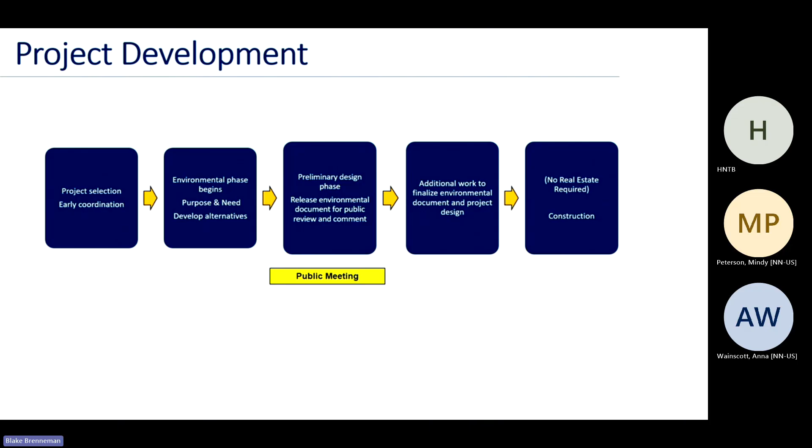The fourth stage involves additional work to finalize the environmental document and project design. After receiving input, the project team finalizes the environmental document and design plans, and the project decision is made. The fifth and final stage is project letting and construction. The project is advertised for contractor bidding and construction can begin. Environmental commitments are carried through to construction to ensure compliance.

The purpose and need of a project is the identification of an existing or potential issue within our transportation infrastructure and the proposed action or plans the proposed project is expected to address. The need for the project is the existing truck parking lots, which are undersized for current and predicted future capacity demands. Lack of adequate parking availability has resulted in unauthorized truck parking along the entire lengths of the entrance and exit ramps at the northbound and southbound rest areas.

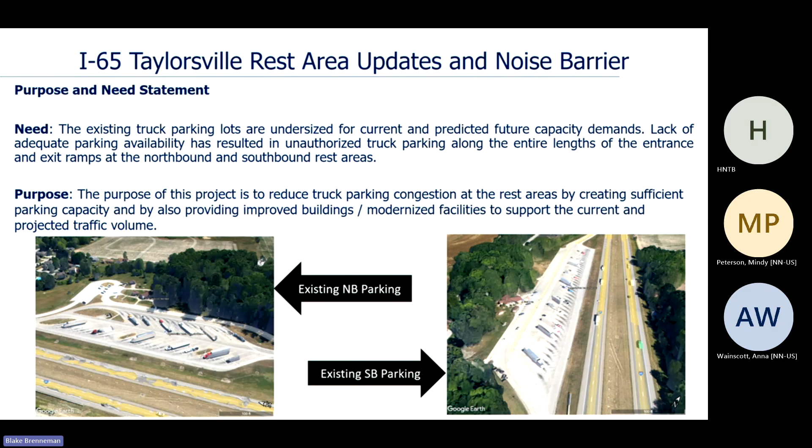The purpose of this project is to reduce the truck parking congestion at the rest areas by creating sufficient parking capacity and by providing improved buildings and modernized facilities to support the current and predicted traffic volume. The photo on this slide shows the current Taylorsville rest areas.

The no-build alternative. This alternative allows the existing facilities to remain in place with no improvements and no financial cost or environmental impacts. This alternative does not meet the purpose and need of the project because it does not address the undersized truck parking capacity. Therefore, this alternative has been dismissed from further consideration. Based on INDOT's rest area and truck parking plan, no other alternatives other than the no-build and preferred alternatives were considered.

INDOT currently operates 26 rest areas and welcome center properties across the state. The goal of these facilities is to serve the traveling public by providing opportunities for travel breaks on the interstate system. With safety as a primary consideration, INDOT's rest area and truck parking plan establishes layout guidelines as well as recommendations for the future of the INDOT rest area and welcome center portfolio.

This investment will provide the opportunity to increase the total number of INDOT's truck parking spaces by 1,161. This will be achieved through the complete property reconstruction of 9 new welcome centers, the addition of 2 new rest areas on I-69 in southern Indiana, 10 rest area transitions to truck parking only facilities, and 4 complete rest area property closures. Now, I'll pass the presentation off to Imtiaz with JSE to discuss the project location.

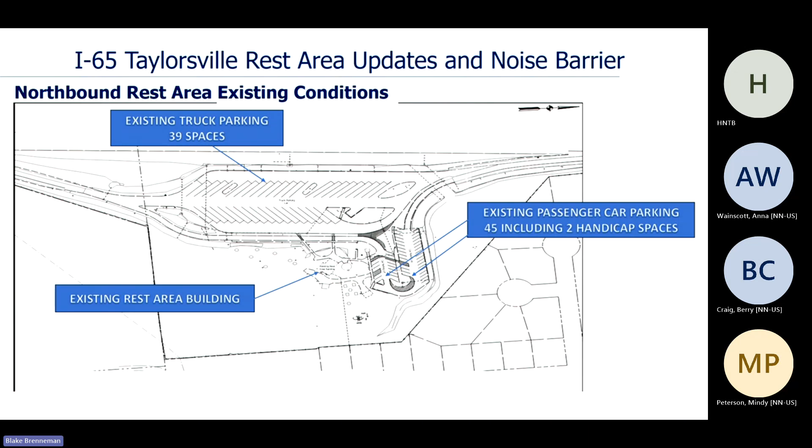As part of the proposed improvements, the existing rest area will be converted into a truck parking only facility and will provide 82 truck parking spaces. It will also have a combined restroom and vending building, as well as a separate maintenance building. Existing water, sewer, and electric utilities will continue to provide the same services.

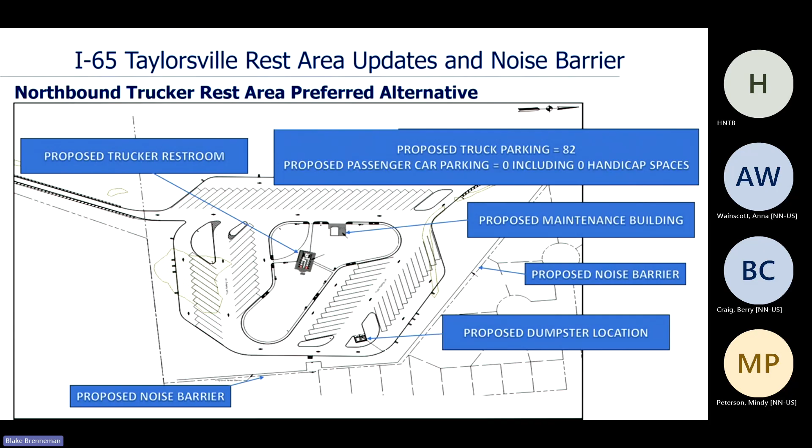Noise barriers will also be constructed along the east right-of-way line of the rest area from the beginning of the truck parking area encompassing the entire truck parking area, as well as along the I-65 northbound entrance ramp up to the last residential area. In addition to this rest area, there's private sector travel break opportunities on I-65 at US 31, mile marker 73, located approximately 4 miles north of the I-65 northbound Taylorsville rest area.

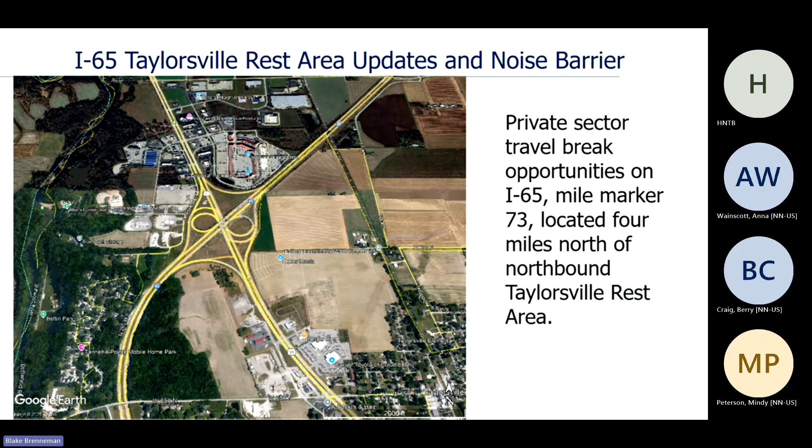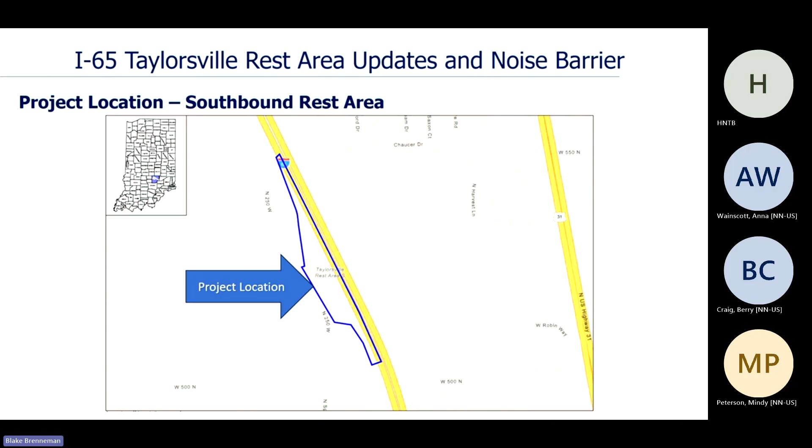This slide shows the existing I-65 southbound rest area location with respect to adjacent residential areas, County Road North 250 West, as well as West 500 North. The existing rest area is located on I-65 southbound, approximately 2 miles south of the I-65 and US 31 interchange in Bartholomew County.

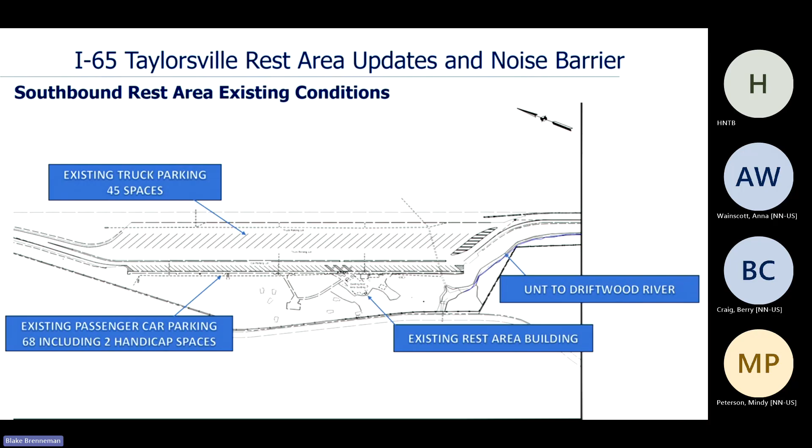The existing I-65 southbound rest area consists of 68 car parking spaces, including 2 handicap spaces, as well as 45 truck parking spaces, and also consists of a smaller rest area building with restrooms, a separate vending building, as well as a separate maintenance building.

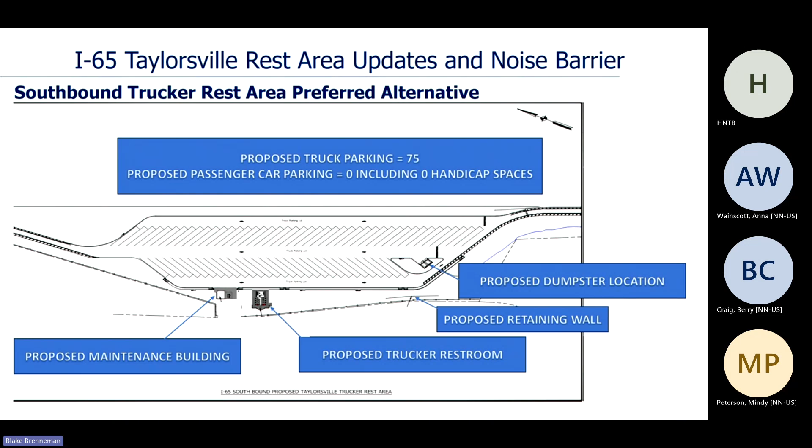As part of the proposed improvements, the existing rest area will be converted into a truck parking only facility and will provide 75 truck parking spaces. It will also have a combined restroom and vending building, as well as a separate maintenance building. Existing water, sewer, and electric utilities will continue to provide the same services. No noise barriers are planned for this site.

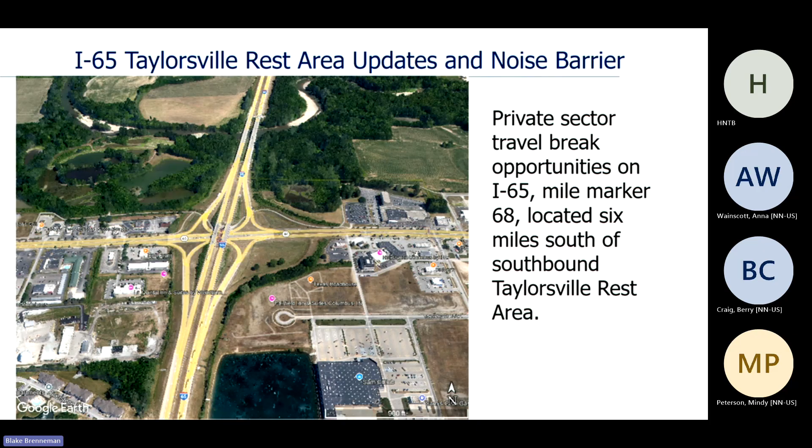In addition to this rest area, there are private sector travel break opportunities on I-65, mile marker 68, located approximately 6 miles south of the I-65 southbound Taylorsville rest area. Now, I'll pass the presentation off to Jas to discuss the project environmental aspects.

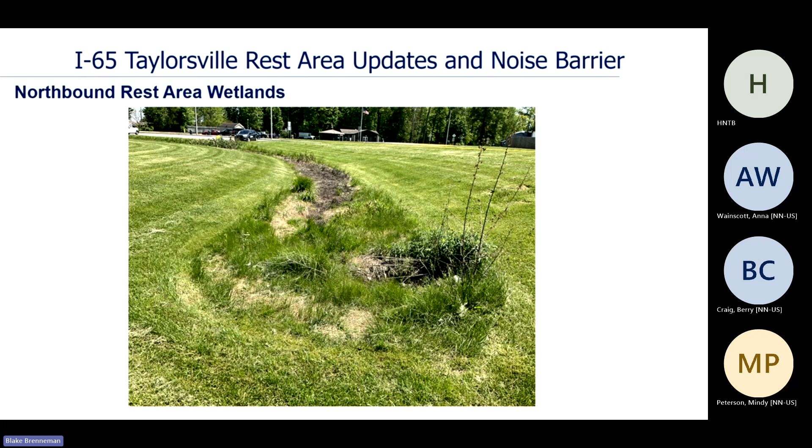A total of approximately 7.1 acres of terrestrial habitat impacts will occur at the northbound and southbound rest areas, including just under 4.2 acres of tree removal due to demolition of existing rest area facilities, construction of new rest area facilities, and grading. Avoidance and minimization measures considered include minimizing the size of the project area, minimizing vegetation clearing to the furthest extent possible, and seeding disturbed areas after construction. This photo shows terrestrial habitat that will be disturbed at the northbound rest area.

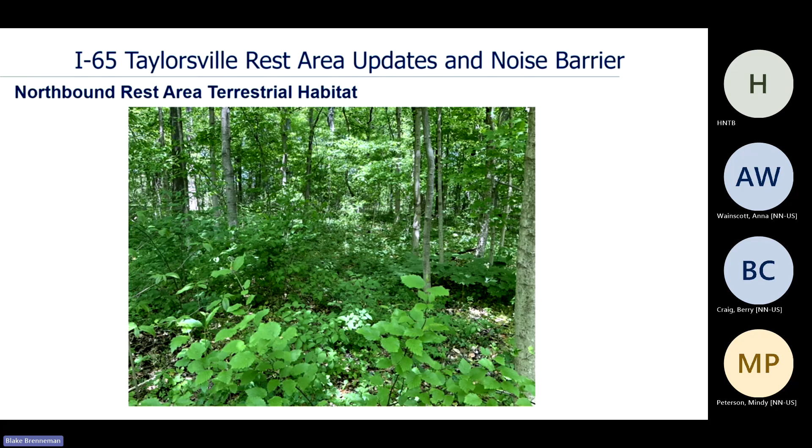1 stream and 1 wetland are present at the southbound rest area. An unnamed tributary to Driftwood River flows northwest through the southbound rest area, along the end of the parking lot and exit ramp. Approximately 156 linear feet of permanent impacts to this stream are anticipated as a result of grading.

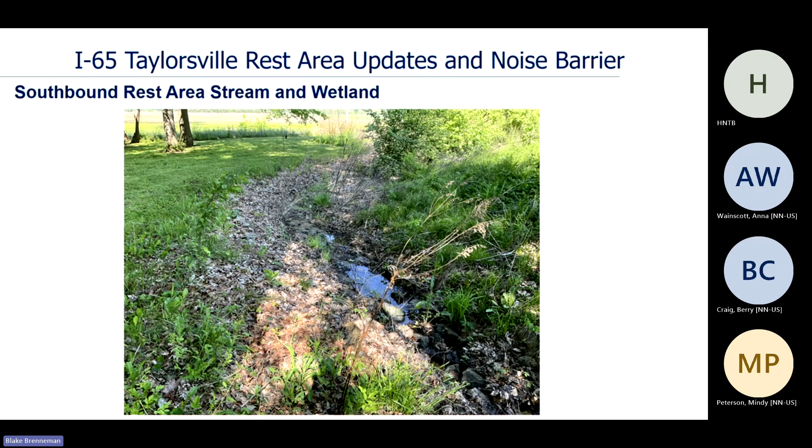The following is a presentation of INDOT's noise barrier policy prepared by HNTB. Thank you, HNTB, for allowing the use of your video.

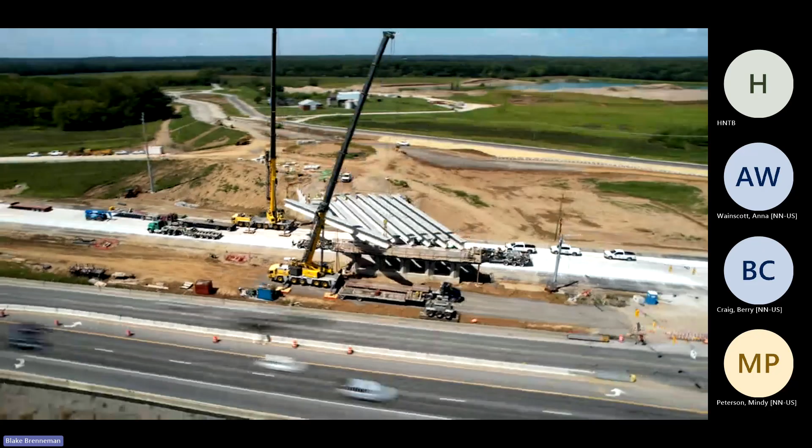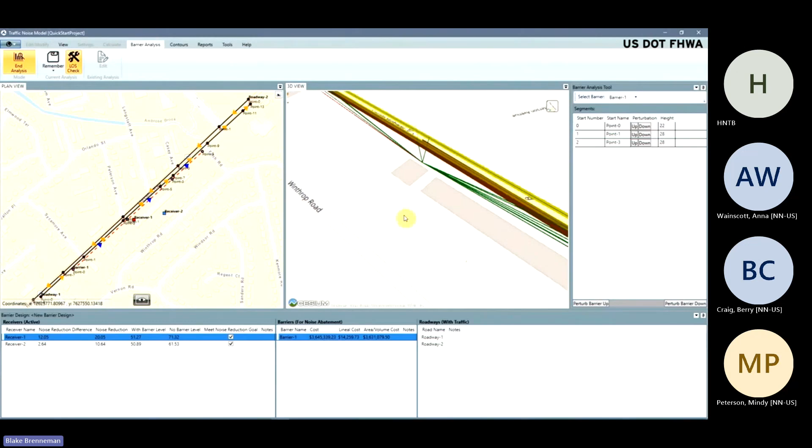As the crossroads of America, Indiana is working to improve its roads. With new infrastructure comes the potential for more noise. Certain types of projects, such as adding travel lanes, require a noise analysis. In compliance with Federal Highway Administration guidelines, INDOT has a noise policy to ensure decisions about noise barriers are consistent across the state. Here's how it works. Step 1. The traffic noise model. We use a model to determine the existing noise levels and predict how the noise will grow in 20 years. The existing model is validated through in-field measurements.

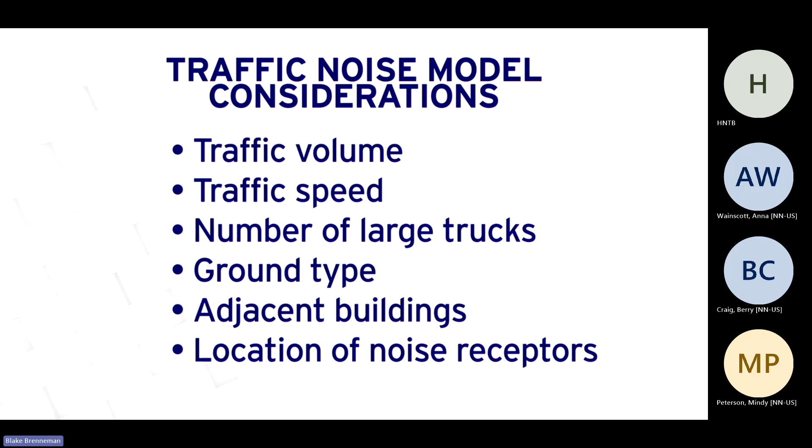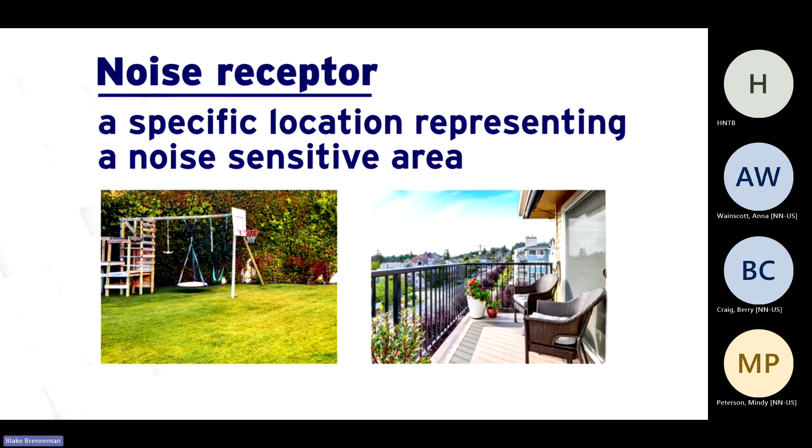The model considers many factors, including traffic volume, traffic speed, number of large trucks, the ground type, adjacent buildings, and location of noise receptors. A noise receptor is a specific location representing a noise-sensitive area. Noise receptors can include places like residential backyards or apartment balconies. After the model is done, we move on to step 2, identify noise impacts.

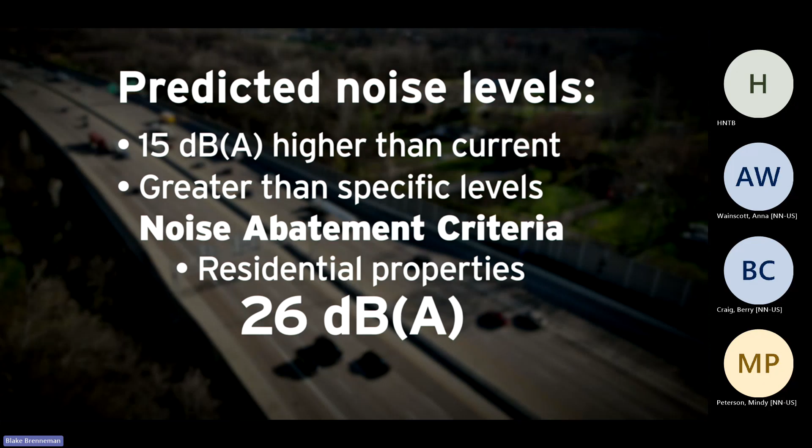There are 2 ways for a project to be considered for noise barriers. Predicted noise levels are 15 decibels higher than what they are currently, or noise levels are predicted to be greater than specific levels called noise abatement criteria. For noise at residential properties, this specific level is 66 decibels. But what does that mean? A normal conversation between 2 people 3 feet away is usually measured around 60 decibels. At the Indianapolis Motor Speedway, the track can be 100 decibels or louder.

Not all changes in sound are perceptible by people. A change in sound of plus or minus 3 decibels is barely perceptible. Plus or minus 5 decibels is clearly perceptible. And plus or minus 10 decibels will be perceived as twice or half as loud, respectively.

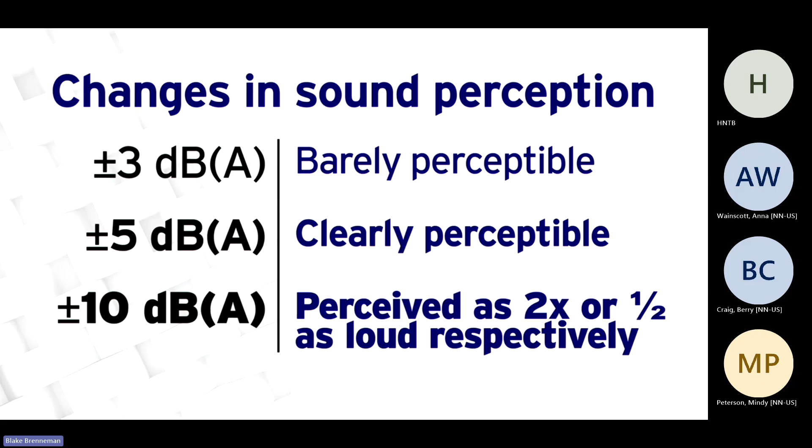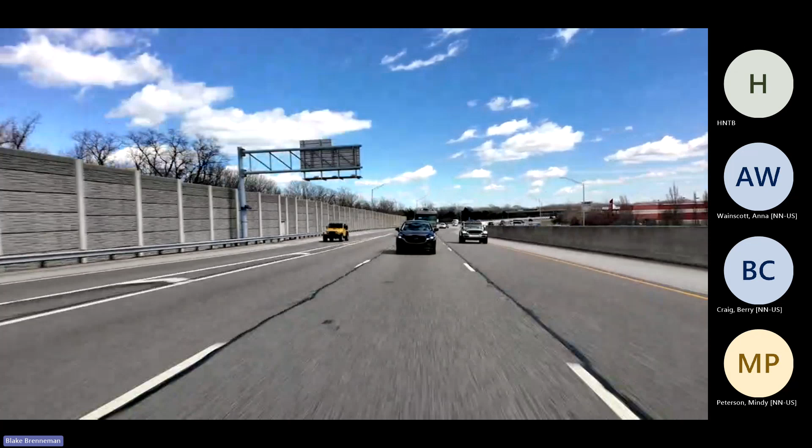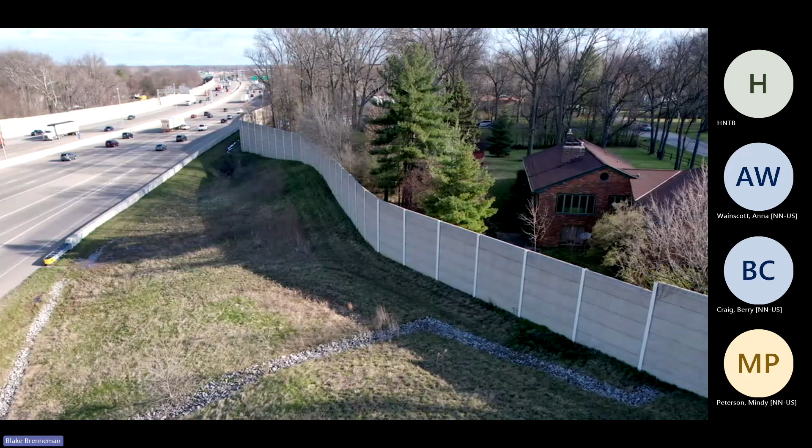Once the noise impacts are identified, INDOT will consider noise barriers near those impact locations. Noise barriers can help block the increased noise from the interstate, but they aren't effective everywhere. They work by blocking some of the sound from the interstate. They need to be tall enough and long enough to block the line of sight between the interstate and residences. The noise barriers will only block between 5 to 10 decibels of sound, so some noise will still be heard.

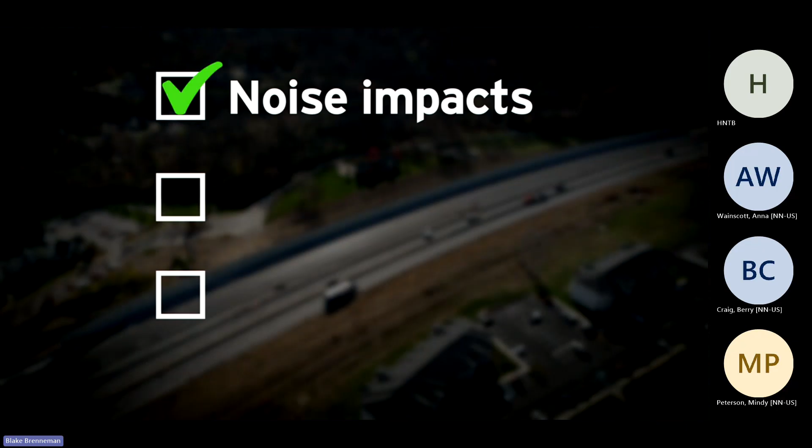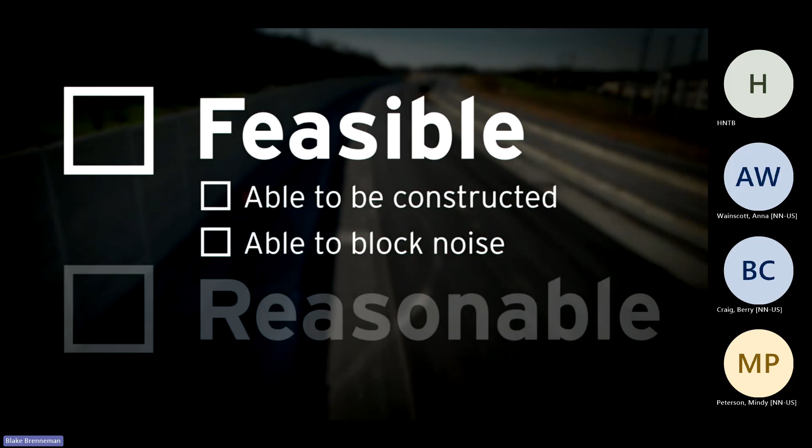So, if the noise model shows there will be noise impacts, there are 2 other things INDOT must consider before putting in a noise barrier. Per their policy, INDOT needs to make sure the barriers are feasible and reasonable. To be feasible, a noise barrier must be able to be constructed at a given location and be able to block noise. To be reasonable, a noise barrier must be under the maximum square footage per benefited receptor and reduce noise for people directly adjacent to it.

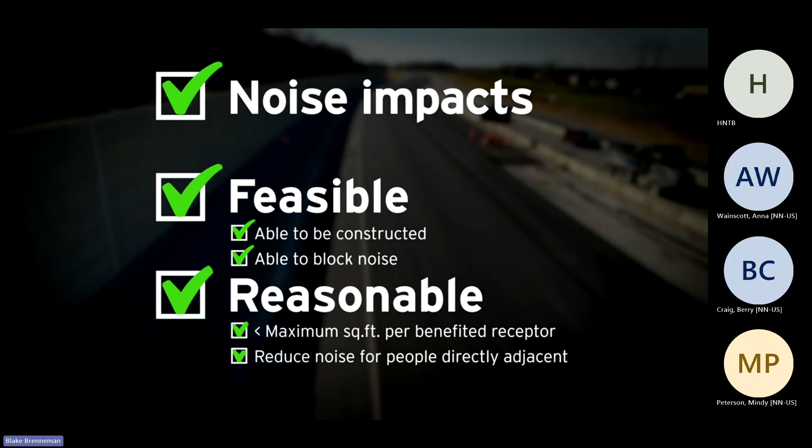If those boxes are checked for a noise barrier, INDOT then sends surveys to adjacent property owners and residents to get their input on whether they want it constructed. Only property owners and residents who would be benefited by the barrier are sent a survey, which includes those that would receive 5 decibels or more of noise reduction from the barrier. INDOT builds noise barriers to improve the lives of those living near the road, but adjacent property owners can still provide input to determine if they will be constructed.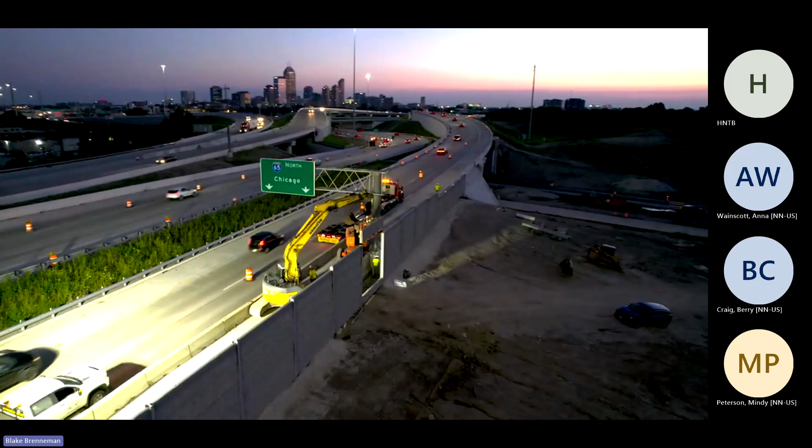If the noise barriers are feasible, reasonable, and desired by adjacent property owners, then INDOT will build them as part of the project. It's all a part of their mission to build infrastructure that enhances quality of life for Hoosiers.

The Federal Highway Administration, as well as INDOT's noise policy, requires that the consideration of noise barriers occur as part of added capacity roadway projects on areas surrounding the roadway. A change in pavement or increase in traffic over the years does not in itself initiate or warrant a new noise analysis. However, in the event an added capacity project gets programmed, such as this project, a formal noise evaluation is performed.

When a capacity project is planned, INDOT evaluates the need to add noise barrier walls. To meet feasibility, there must be a significant reduction in sound of 5 decibels or more to a significant amount of receptors, such as homes, hotels, apartments, businesses, etc.

Metric has completed the noise study for the Taylorsville rest area truck parking expansion. It was found that 16 residential receptors were modeled to be impacted following construction at the Northbound rest area. These receptors had a predicted noise range of 66.4 decibels to 72.3 decibels. Various barrier configurations were modeled to attempt to achieve a noise reduction of 5 decibels and 7 decibels.

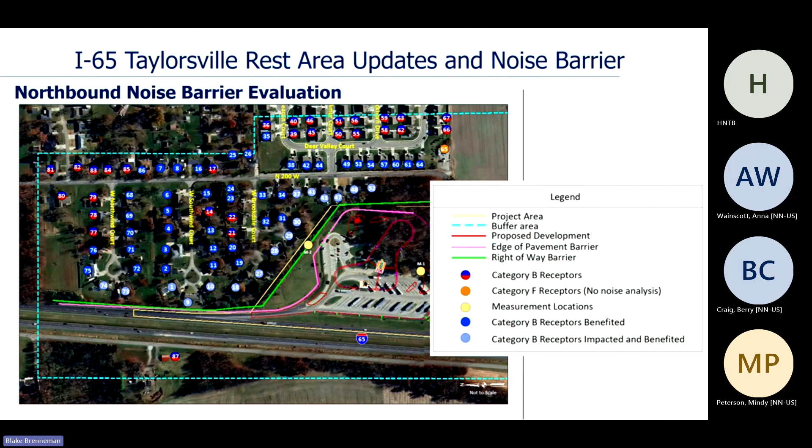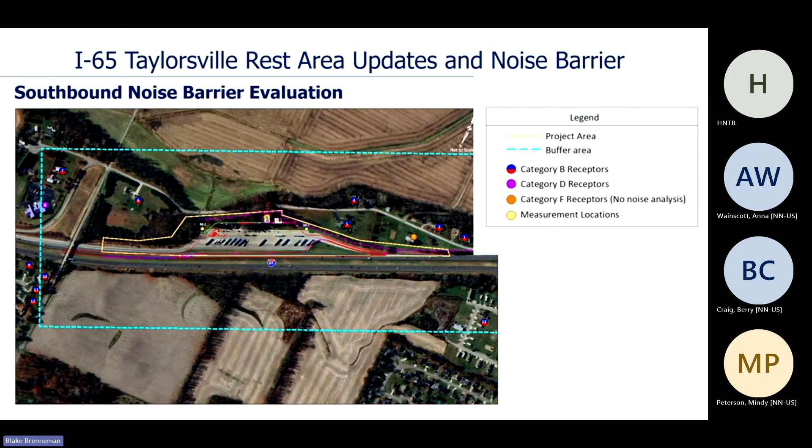The southbound model indicates that no receptors were impacted by a noise level increase of greater than 15 decibels beyond the existing conditions. The model indicates that none of the 13 receptors were impacted by approaching or reaching their noise abatement criteria sound levels in the existing models. The average noise increase across all sensitive noise receptors at the southbound rest area is approximately 0.6 decibel from the existing 2024 conditions to the proposed 2044 conditions. Therefore, a noise barrier is not required at the southbound rest area.

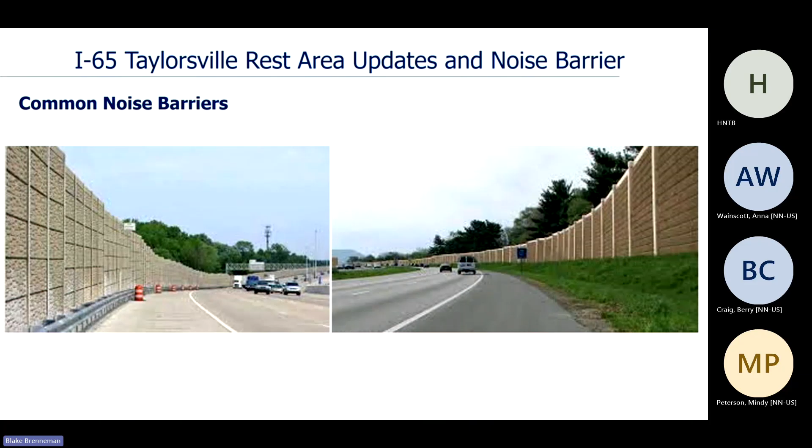As seen in the noise policy video, noise barriers commonly use concrete panels between steel supports and are designed to reduce traffic noise by blocking sound waves either by absorbing, reflecting, or forcing them to take a longer path to receivers. This photo shows typical noise barriers installed.